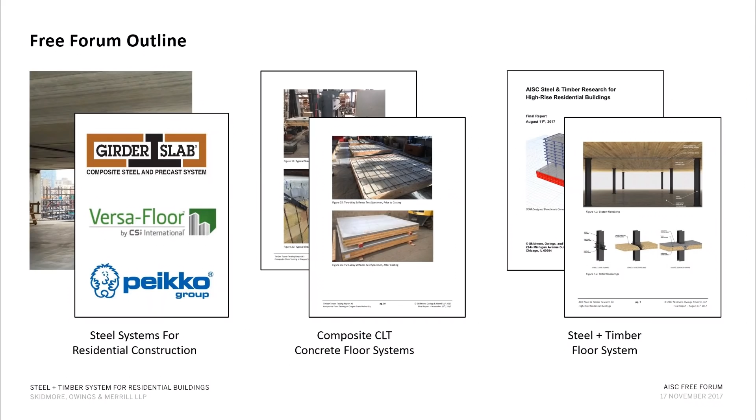The outline of today's talk is going to cover three main sections. The first one will look at steel systems that have been developed to date for residential construction. We'll then discuss composite cross-laminated timber floor systems that use reinforced concrete topping slabs as the basis for the research project going forward. And then lastly, we'll talk specifically about the structural steel frame and timber decking system that we've developed for mid and high-rise buildings.

To start, we want to put things into context and why it's important to develop sustainable systems for mid and high-rise buildings. When you look at apartments and condominiums, hotels, student housing, and senior housing, they account for 27% of the total construction volume based on AISC's national market analysis. This is a very large percentage of construction. So what we want to be able to do is develop appropriate structural systems for these buildings to give more differentiation in the marketplace and more options for our clients.

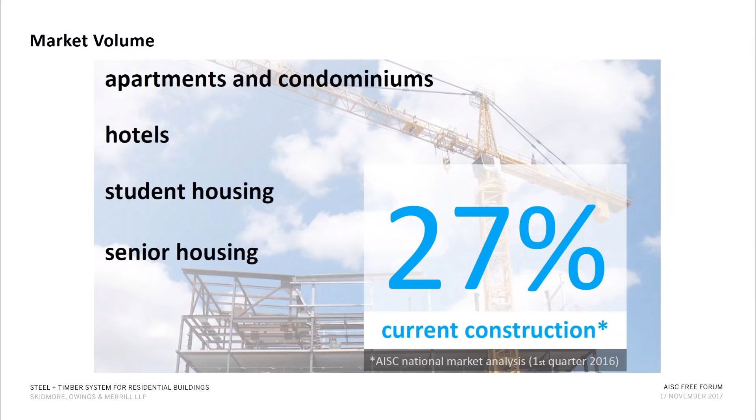Residential buildings have a unique set of criteria that need to be considered. For starters, there's a unique layout of rooms and services that change depending on the unit types and positions, and these can be relatively different from level to level, whether it's a studio, 1, 2, or 3 bedroom unit, and they can change from story to story. Compared to an office building, accommodating these sometimes random-seeming room layouts is a major criterion. One of the ways this is achieved is with a flat soffit condition - meaning a flat bottom of structure with no projecting beams. This allows you to plan out units of any size and configuration without regard to the structural system. The only thing you have to contend with are the columns in the space.

Residential buildings also need to consider the high acoustic requirements associated with this construction type. The building codes demand a certain sound transmission class, or STC, that grades the amount of acoustic resistance between units. It's obviously very important for a residential building, because when you're trying to get some sleep while there's a large house party happening above you, you don't want that noise coming down into your space.

And then lastly, the floor heights and costs. One of the things that drives the cost on these buildings are the floor-to-floor heights. So if we can minimize the structural depth associated with the system, we can reduce floor-to-floor heights and the associated cost. All of the research we're going to show you today is predicated around an SOM design benchmark shown on the right-hand side. This uses a conventional cast-in-place concrete frame with 8-inch thick post-tension slabs. We would consider this to be the standard of what you would see in residential construction typically today. It's a very, very economical system and allows for all the things just discussed.

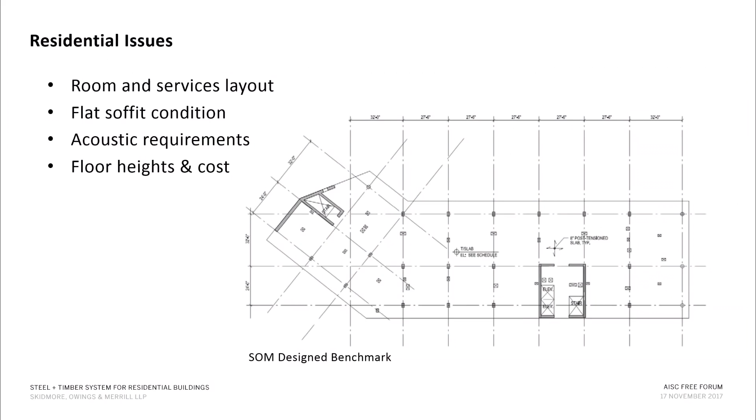So when we go and talk about our proposed system today, it's going to be through the lens of this benchmark concrete building. So let's talk about some of the steel systems that have been designed for residential buildings today.

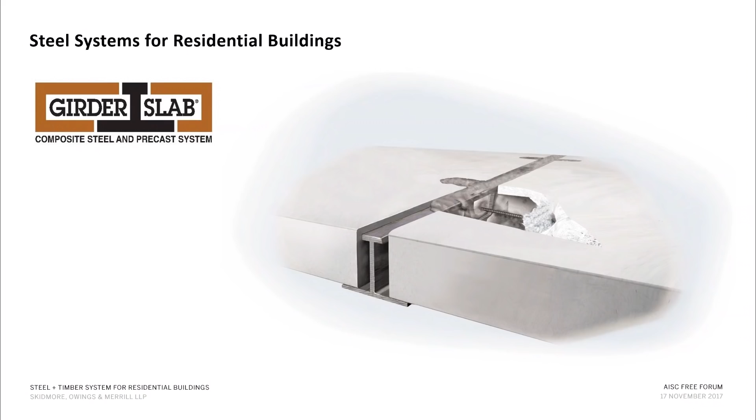One of the good systems out there that we've seen is the girder slab system. It's a composite structural steel beam that's asymmetrical and precast concrete floor system, typically hollow core plank. This system uses a structural steel frame where the asymmetrical beam has a larger bottom flange that allows the hollow core plank to be set on the bottom flange and then grouted in for its final condition.

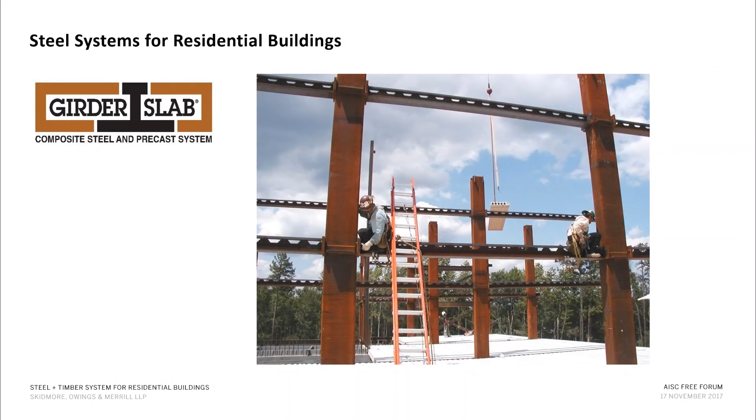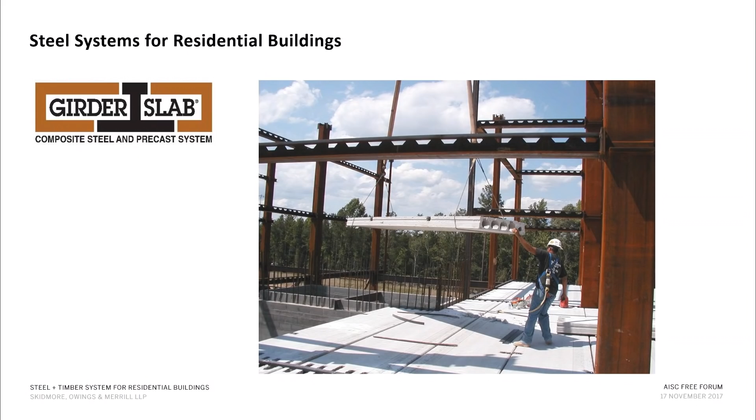It uses a castellated beam style structural frame that allows the concrete to flow through and join them together. Here you can see some of the erection of a frame using this system. The structural steel goes in, and then the hollow core planks just sit on the bottom flanges, creating an almost near flat soffit condition. So again, you only have to contend with the position of the columns related to the unit layouts in the building. And this is the final product.

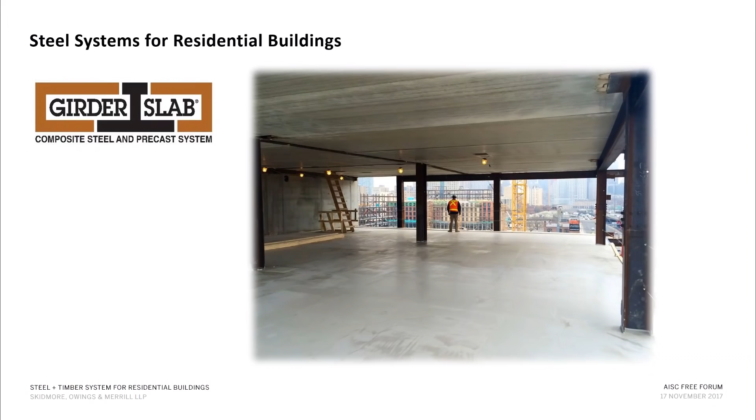As you can see, it has a lot of the same benefits that you would see with other technologies in terms of unit layout and space planning. You can get large bays with minimal obstruction, so a very good system.

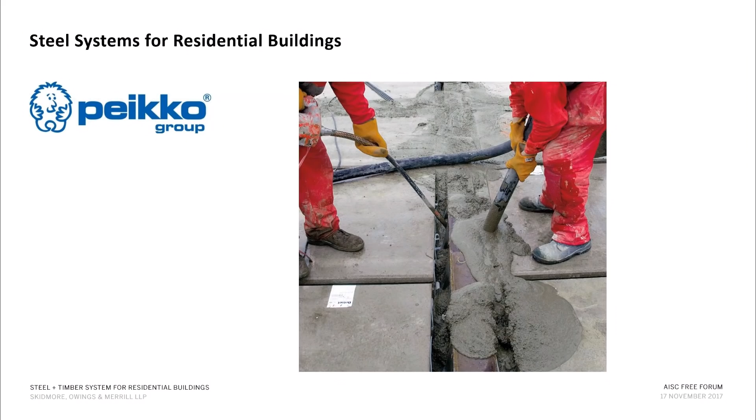There's other approaches as well, like the Peikko group shown here. It's a similar concept where you're using a special structural steel beam with some hollow core planks resting on it. This beam uses a trapezoidal shape where the bottom flange again is extended to accept the precast, but now when the concrete is poured and grouted in, it makes a continuous beam. Here you can see that operation right now where the concrete is getting poured for the final condition.

And this is a built example here. Again, a similar approach where you have a flat soffit condition using the post-tensioned or pre-tensioned hollow core planks. And lastly, we wanted to show a different approach.

The first two were showing the hollow core planks. This one uses actually a deeper deck system. This is the VersaFloor system using a deep deck profile, which can give you, I believe, 7-inch deep metal decks. There's a couple different ways that they can use these. You can do it with conventional structural steel beams or drop down. And they've also developed a system called the Diversakore, which uses a bent steel plate as the final beam.

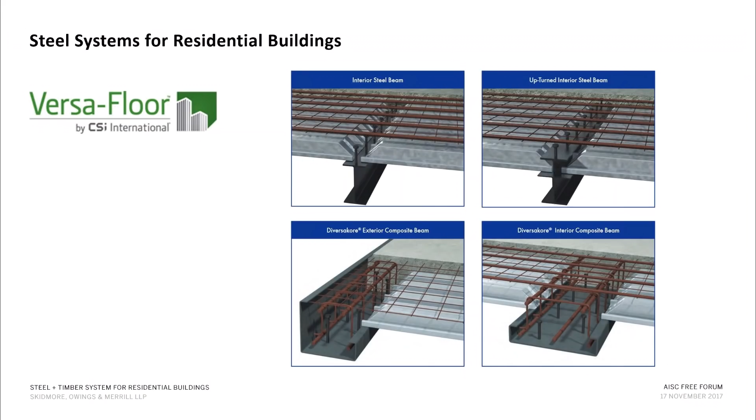In this way, basically, all of the steel is acting like leave-in-place formwork. So again, another operation with some similarities here, but again, a near flat soffit condition for each of these types for the discussions mentioned earlier. And here you can see them pouring the floor. So again, the end product for each of these is essentially the same. You have a concrete slab as your substrate for finishes and for everything else in your building, a structural steel frame, but very few beam conditions to deal with.

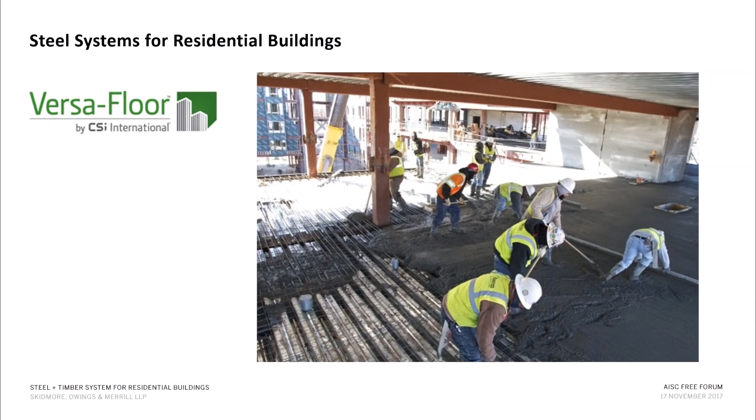So moving on and looking at new opportunities, let's talk about composite cross-laminated timber and concrete floor systems.

SOM has been researching timber construction for over 5 years now, looking at mid and high-rise buildings. We've shown 2 reports that are available on the left-hand side, with 2 more that are going to be published in the coming days, that being the AISC report we're discussing today, but then the Oregon State report shown with some of the testing images on the right-hand side.

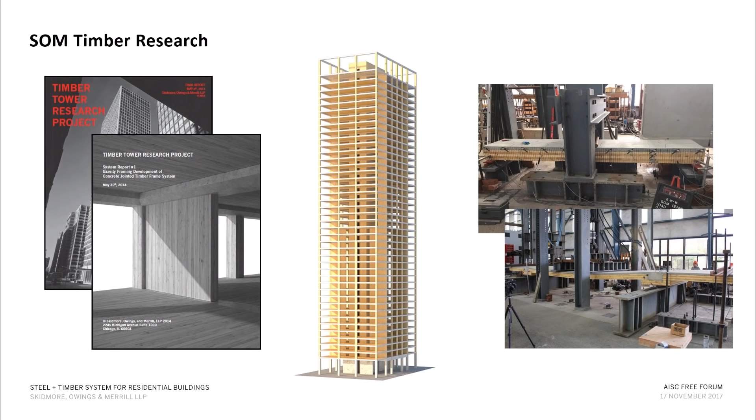The research we did looking into the high-rise building started with a survey of all the available timber technologies we had available to us. This ranges from the timber elements themselves, shown on the left-hand side, to the connector types, shown in the middle, with some of these fancy screws and glued-in plates. And then lastly, looking at timber concrete composites, an idea of combining the 2 materials as shown on the right-hand side.

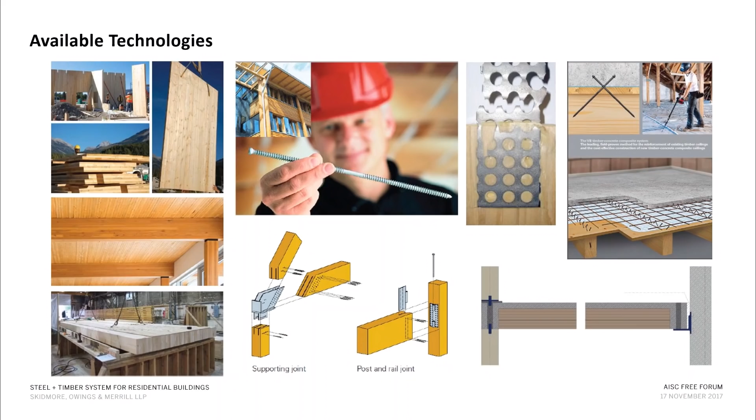If we look at the timber elements themselves, there's a lot of different available technologies out there, and we put them all into a category of mass timber. What we mean by that is things that have similar properties to a natural heavy timber element, but that are built up from individual pieces of wood. So in that family would involve things like glue laminated timber columns and beams, like shown in the upper left-hand photo, nail laminated timber decks, shown in the lower left-hand corner, and then also the finished product on the upper left.

The nail laminated timber decks are essentially 2x6s or 2x8s that are nailed to each other on the side face along the entire way to build up a solid timber deck. And then lastly, there's cross-laminated timber on the right-hand side, which is essentially like mega plywood, where you have boards that are glued on their face and then alternate in directions each 90 degrees.

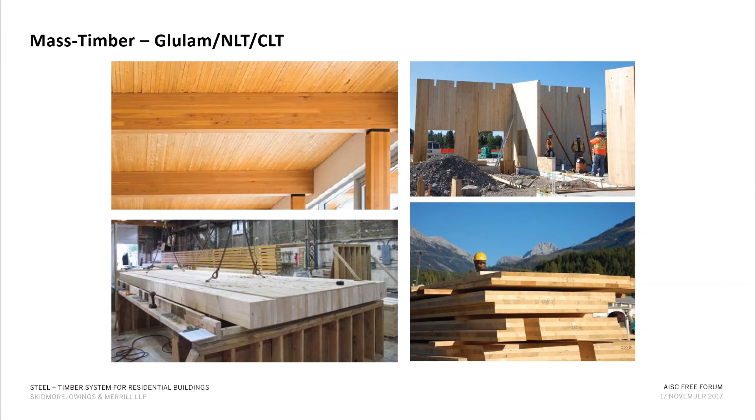We'll focus primarily on cross-laminated timber because we see that as the way of the future over some of these other technologies. CLT itself has a lot of advantages. It's prefabricated, lightweight, a thermal insulator, and it has certain marketing advantages. But there's other issues too that make it attractive for residential construction, including its two-way spanning capabilities.

Because of the cross-lamination and orientations changing every layer, it allows the material to span in two directions. That's really important when you start to look at floor penetrations that don't necessarily align with your structural module. It's nice to have that aspect because it allows you to get loads around the areas.

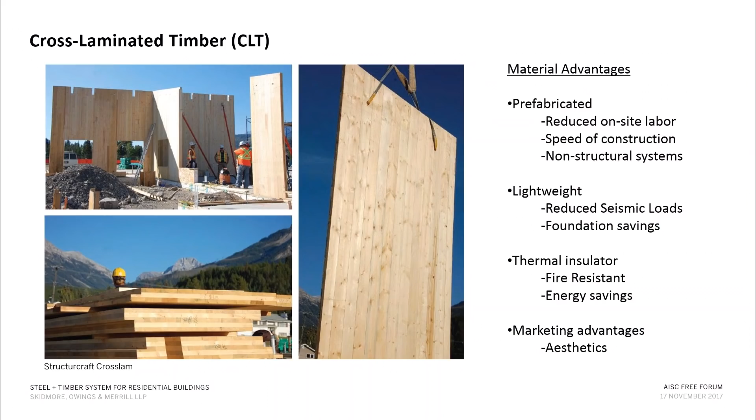One of the challenges with cross-laminated timber is the acoustics associated with it. Wood is about 1/5 the density of concrete, so it becomes very lightweight even when it's a solid timber floor system. So to solve the acoustics, there's a couple of ways to do it.

One is to have a drop ceiling as shown on the left-hand side. That's got a lot of challenges associated with cost, and it also increases the ceiling section. On the right-hand side is a more common approach, and that uses a concrete topping slab, be it non-structural or structural, to add a little bit of mass into the system and to isolate the layers from each other.

And in doing so, you can get an STC that's code acceptable and still expose the bottom side of the CLT, which we see as a good approach.

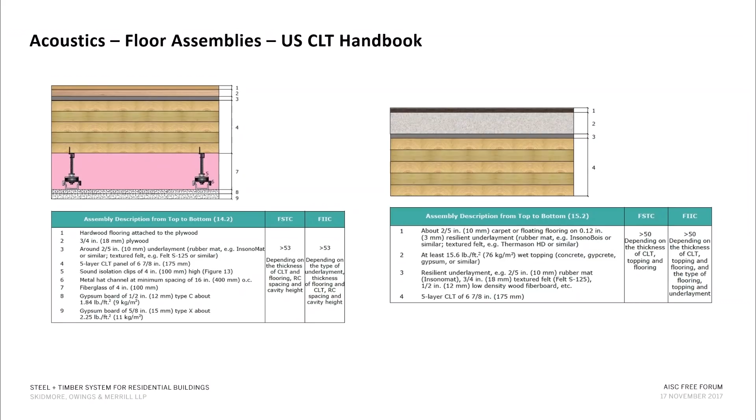The other thing you need to be aware of when talking about cross-laminated timber is the fire resistance. Again, we use the term mass timber because it has a lot of similarities with heavy timber, including the charring response to fire. So when we look at the fire design of CLT, we have to consider three things: the structural resistance, its ability to carry load long-term after it's lost section due to charring; an integrity failure, which prevents the movement of heat and flame through to another side; and then lastly, the insulation failure.

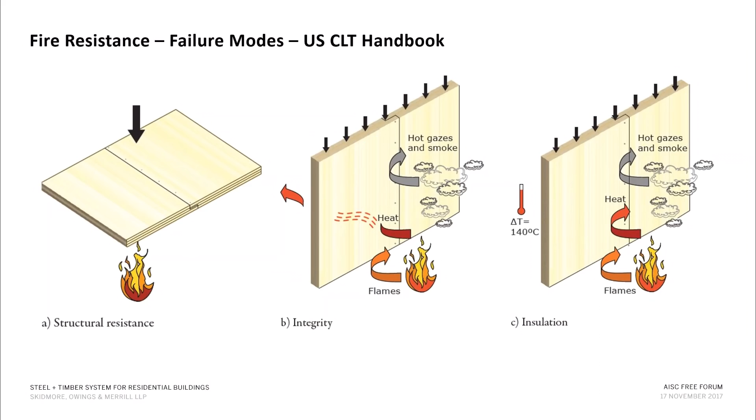We mentioned that CLT is a natural insulator, so there's very little issue with the temperature increase on the other side. It's really the structural resistance and integrity that we need to consider.

Considering those two failure modes, there's two different ways to look at it. The first is the charring behavior shown on the left. Charring is a natural phenomenon that insulates the structural core of the timber element, keeping it cool and structurally sound, meaning it can carry load.

There's a lot of methods out there substantiated by testing results that allow you to calculate a reduced strength due to charring in a fire condition to verify structural integrity. That's how you solve the first one.

The second one is with testing, where we're trying to look at the actual integrity failure and not allowing flame to pass to the next level. This is actually the more concerning thing when it comes to timber. There's a lot of reserve capacity, but letting the flames pass through is actually a bigger issue. So when these tests are done, you can see on the right-hand side, they're typically showing failures in integrity.

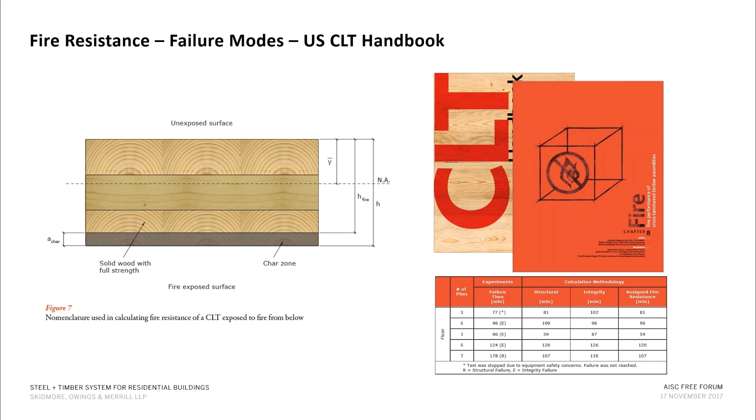We can solve that, again, with a concrete topping slab that you might need for acoustics. This is where it leads us to in terms of composite concrete topping slabs and what we want to achieve. We know that we want the concrete topping slab to solve our acoustic issues so that we can expose the underside of the timber.

The concrete topping slab also increases the fire resistance by creating a non-combustible barrier in between levels that cuts off the chance of an integrity failure.

By making them structural concrete topping slabs and composite, we can actually increase the span length. That means fewer columns on the inside and easier to plan out room layouts. When made structural, the seismic diaphragm can also be handled just in the reinforced concrete portion itself, so it simplifies the design. And lastly, it gives it a measure of durability by protecting the top surface of the CLT.

So when you look at a typical build-up, what you often see is the 5-ply cross-laminated timber, which is approximately 6 3/4 inches thick, plus a concrete topping slab. Our testing at Oregon State University is using a 2 1/4 inch concrete topping slab for a total thickness of 9 inches.

And that's pretty compatible with what you would see in concrete construction for a residential building. Usually it's about an 8-inch concrete slab, maybe a little bit thicker, it can need longer spans. So it's compatible in terms of floor-to-floor heights and ceiling sandwiches.

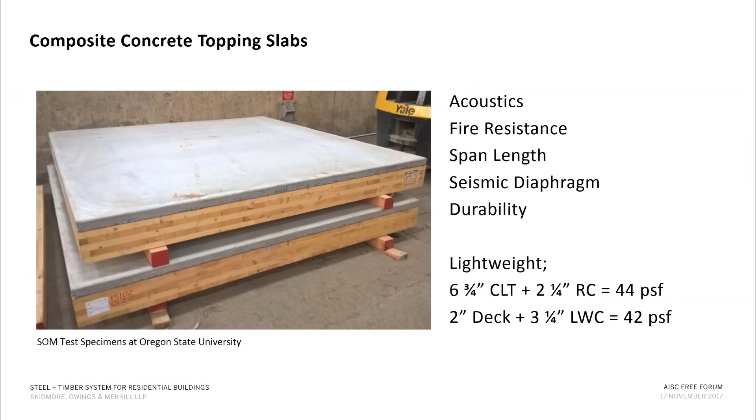The topping slabs we use are typically normal weight concrete, which really comes down to availability. Lightweight concrete isn't available everywhere, so we try to use normal weight concrete where possible. It has a couple other benefits: normal weight concrete has increased tensile capacity compared to lightweight concrete, so you'd typically expect less cracking in your slabs long term, and the additional mass gives you better acoustic performance.

That's important for the CLT. Now, lastly, it comes at a cost of increased mass from a structural perspective, whether it be foundation design, seismic design, or column design. It adds up. So if you compare the same design using lightweight concrete versus normal weight concrete, there's not really much of a difference—it's 38 PSF versus 44 PSF. So when you compare the two materials, it really just comes down to availability. All those other things are basically details. It changes the mass a little, changes the performance a little, but normal weight concrete's available everywhere, so that's what we like to proceed with, and that's what we tested at Oregon State.

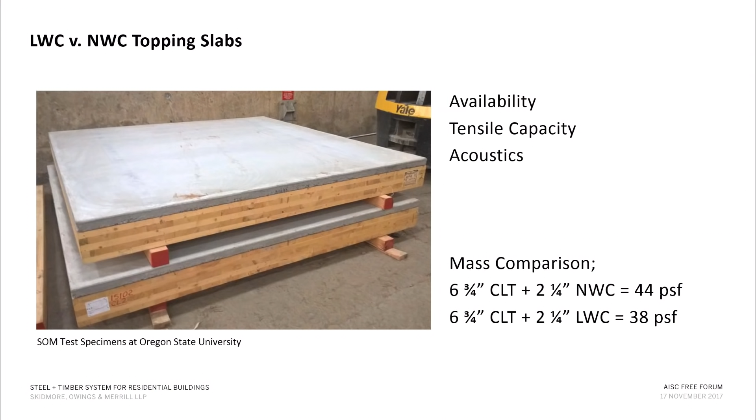Here's the Oregon State testing program. You can see their laboratory here with 3 test specimens down low. We studied over 20 different tests and 14 different specimens, all full scale, looking at different ways to connect and make composite action. One of the connectors we use most frequently is inclined screws, and you'll see those in the reports that will be published soon, showing how we connect them.

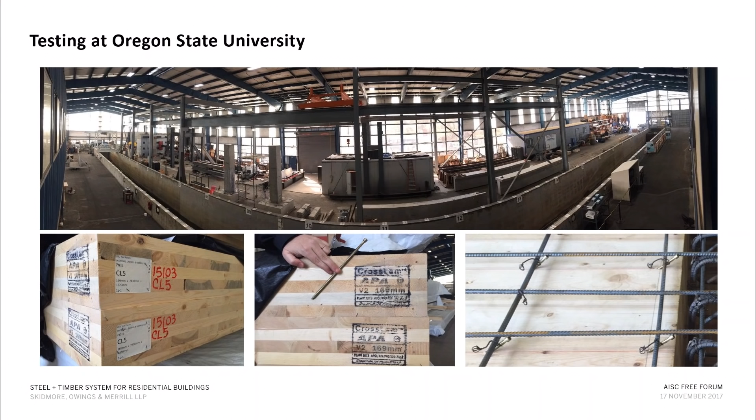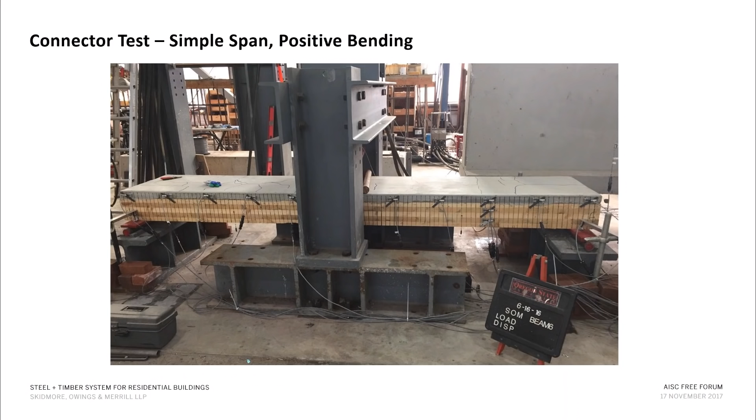One of the types of tests we did was a simple span, positive bending test, looking at the effect of different connector types. We looked at glued-in connectors, mechanical connectors, and some standard shear stud connectors with screws. This also let us understand the different performance and available strength and stiffness from them.

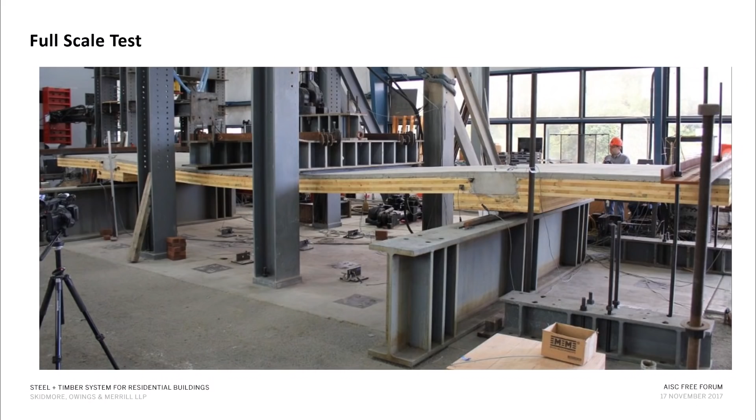Looking at these composites, by making them continuous we can get longer spans, which are better for residential layouts, all while not adding additional materials. We're just taking the materials we already need—CLT and concrete for acoustics—and making them composite.

So moving on now to the main portion of the webinar here, which is the structural steel and timber system that we've developed with the AISC.

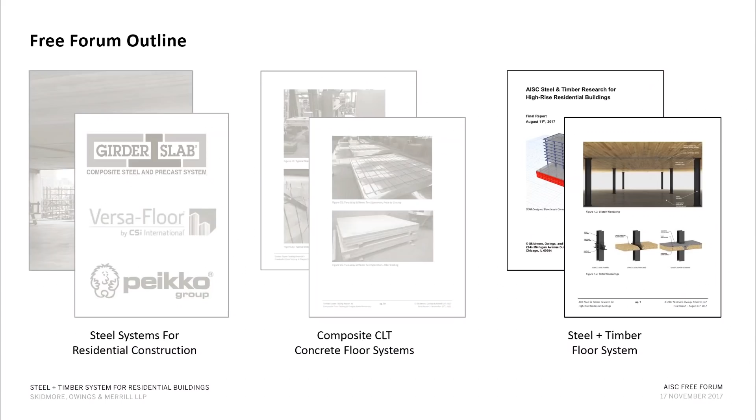Looking at cross-laminated timber and composites, it really is a new technology, and that creates a new opportunity for the structural steel industry.

If you look at the different types of floor systems that have been available, we started with things like clay tile arches and other floor systems, which have now been defunct and replaced by metal deck slabs, precast concrete slabs, and everything else. The idea of a structural steel frame has been a consistent theme in the construction industry for over 100 years, but the actual floor systems we plug into them have changed and will continue to change over time. So now that we see this new decking type system of composite cross-laminated timber floors, it really is a new opportunity for structural steel frames to take a look at and see what kind of benefits can be had by combining the two.

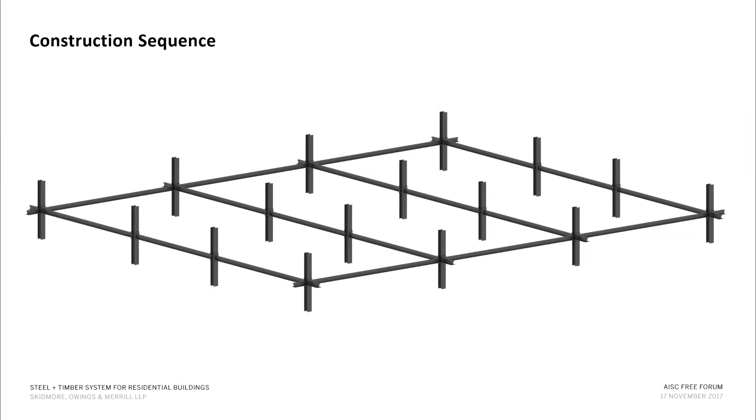So let me show you a little of the construction sequence and how we think a system of this nature would work. You would start again with a structural steel frame of beams and columns, erected for 1, 2, or 3 stories ahead of the rest of the operations on site. After the steel frame is erected, you would then drop in your mass timber decks. In this example, we're talking about cross-laminated timber decks, but you could also do nail-laminated timber if it suited your project.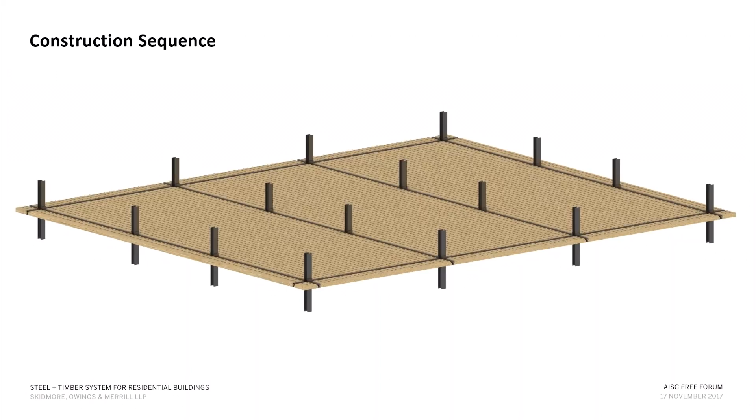After the mass timber decks are dropped in and installed, sitting on the bottom flange of the steel beam, we place reinforcing in the top slab. This would be welded wire fabric typically, and then if you need additional capacity over the beams where you have negative bending or diaphragm loads near a core, you could add additional rebar.

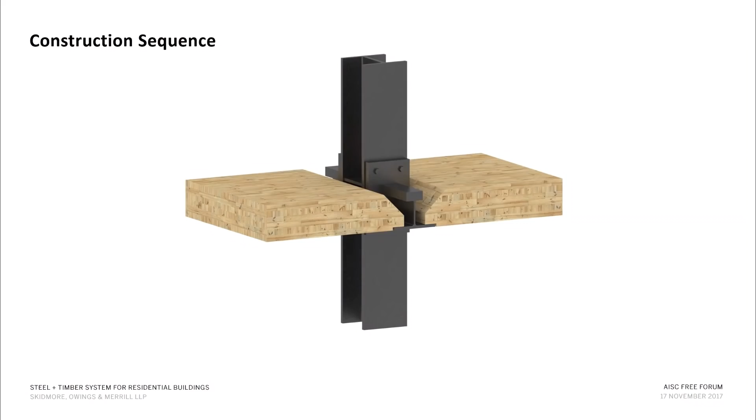And then the topping slab is poured. Taking a closer look, we start with a structural steel beam. Again, we're suggesting an asymmetric steel beam to facilitate the placement of the timber decks. You drop in the timber decks to have a flat soffit condition. Install your rebar and composite connectors, and then pour your concrete to make the entire system work. And that's your final product right here.

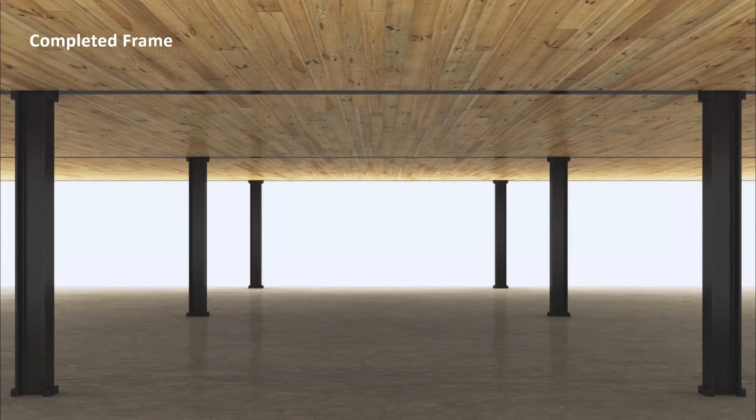What's interesting about this one is that because it's an easy product to CNC, the cross-laminated timber, it's easy to CNC the end connections so that we can actually get a truly flat soffit condition by routering out the thickness of the flanges of the steel beams that it supports.

Looking at the details of the research project, which is going to be published on SOM.com in the coming days, it really breaks down into a few different sections. The goal is to show how the system would be applied to the SOM design benchmark building, but more importantly, show the details and concepts that would be used, which could be applied to framing bay sizes of any size for a real project.

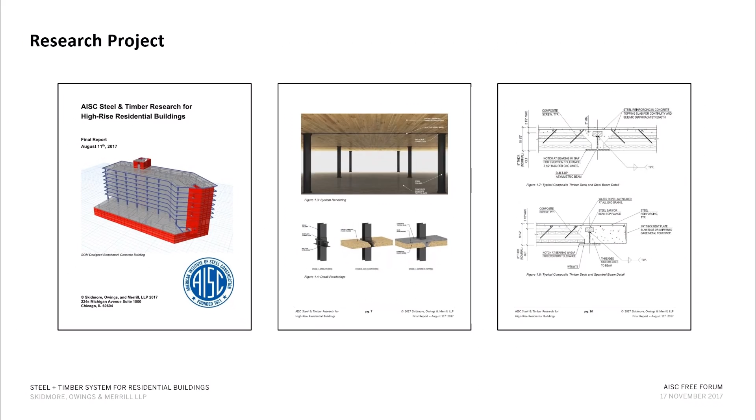It goes through a few different zones, a few different sections, and tries to explain why we're trying to do these things - what are the critical issues in the design process that led us to these decisions. And then we show the approach, and then we finish off with non-structural considerations, and then a comparison to the benchmark.

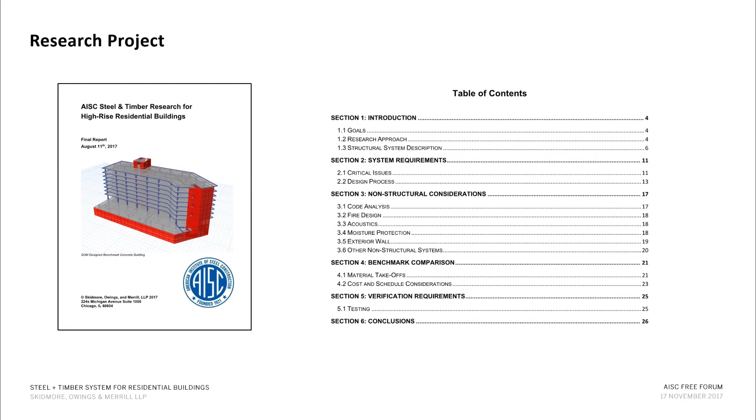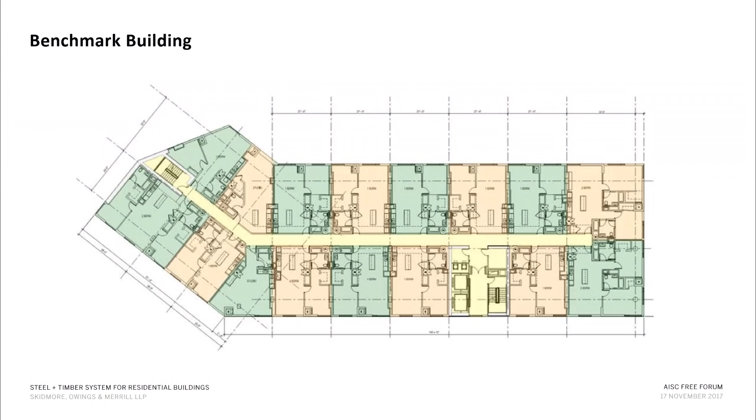Talking about the benchmark, this shows you the architectural floor plans on a typical floor. The yellow sections are common corridor areas and core areas for the elevator core on the right and the remote stair on the left. The green and orange just show differentiations between units and their demising locations. As you can see, this floor plate accommodates a wide range of unit sizes and shapes, and is pretty consistent with what you see in a lot of buildings in this height range, sort of 10 to 12 stories.

This is the structural layout for that same building. You can see there's a reinforced concrete core around the elevators and stairs to the right, and then a reinforced concrete core around the stair to the left, with some additional isolated concrete walls connected into that stair core to give it a balanced stiffness with the core to the right.

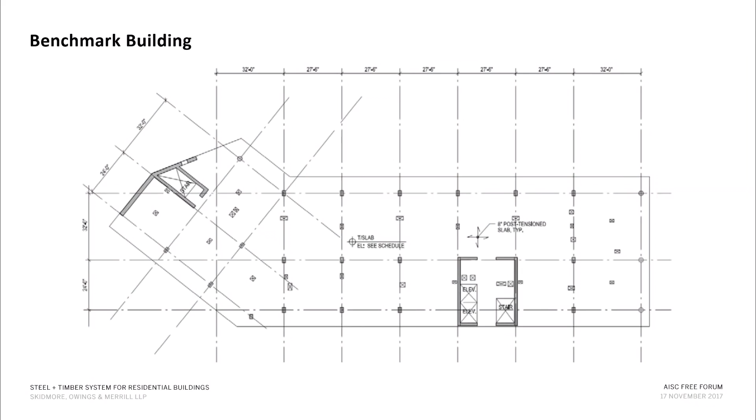There are only 3 concrete columns between the cross section of the floor plate, and we do that to reduce the number, also with a moderate slab cantilever on the 2 sides. It's an 8-inch thick post-tension slab, which is able to achieve these spans and also solves the acoustic issues as well.

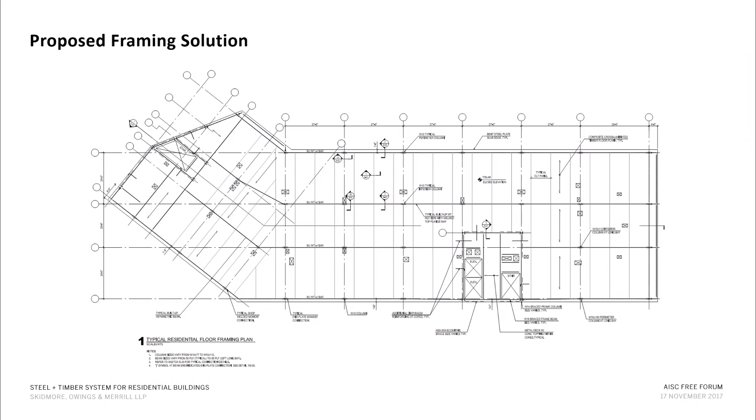The elements highlighted in red are structural steel. Everything else would be composite cross-laminated timber floors. We provided 4 asymmetric steel beams running along the axis of the floor plate, with the timber decks spanning in between them. We located those framing lines so that they would not hit any of the potential floor openings in the system. And then you can see all of the floor openings that go directly through the composite cross-laminated timber deck.

The 2 core areas highlighted in red are structural steel framed cores with composite metal deck slabs. We didn't want to provide any combustible construction within the core area because, again, this is intended for mid and high-rise buildings where performance fire design may be required. So keeping the egress areas non-combustible feels like a reasonable thing to do to enhance the fire performance.

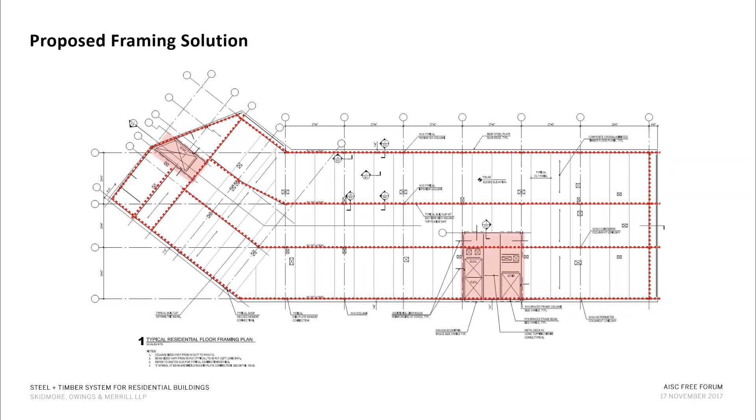This is the typical detail looking at an interior beam. So what you have is the asymmetric beam, steel beam, that's formed with a WT section and a thickened bar welded to the top. That asymmetric beam section allows the cross-laminated timber floor planks to be dropped straight down and supported on the bottom flange. The cross-laminated timber decks are notched as shown to create a completely flat soffit condition.

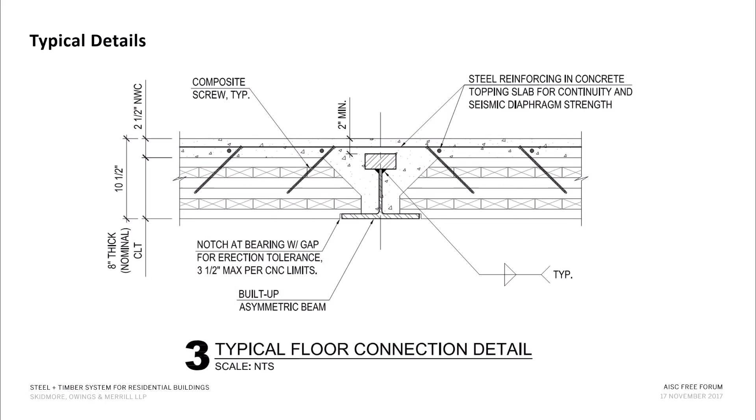And they're also notched to facilitate the concrete placement of the topping slab. This detail also shows the composite connectors to the topping slab and reinforcing over the supports. That reinforcing is continuous and allows the cross-laminated timber floor planks to span as far as we indicate on the framing plan.

This is a typical detail at the exterior condition. At the exterior, we stop the steel beam about 1.5 feet away from the edge of slab, done for the particular constraints of the benchmark building. It's not necessarily a requirement for the system, but we showed it anyways to see how you could achieve a longer slab cantilever with a bent plate bolted to the bottom flange of the WT shape. This has benefits later when discussing the exterior wall connection, but again, a similar detail that allows for a nearly flat soffit condition.

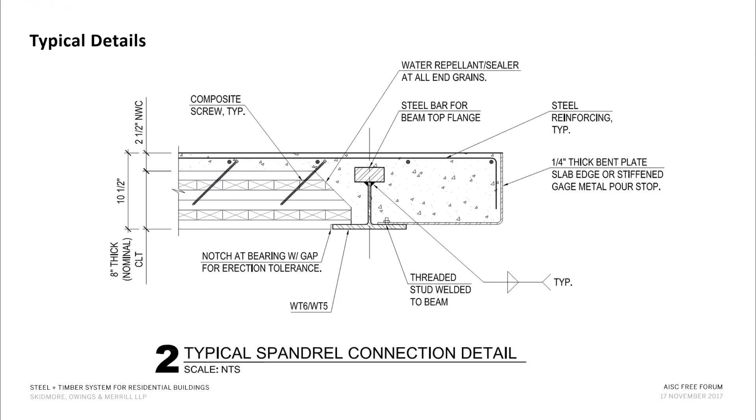If we zoom in and take a closer look at the framing bay, you can see the typical approach: 2 columns spaced at some reasonable module, anywhere in the range of 20 to 28 feet. We're showing 27.6 at this location. Now the challenge with going 27.6 is that the steel beam tends to deflect a lot.

So we want to reduce that deflection so we don't need secondary floor leveling mechanisms. We're kind of stuck because we need to fit the steel beam within the thickness of the floor sandwich, and also need to make that span. So to do this, we provided moment connections at the ends of the steel beams, using end plate moment connections, which are a very economical way to do it if you're just trying to get deflection reduction.

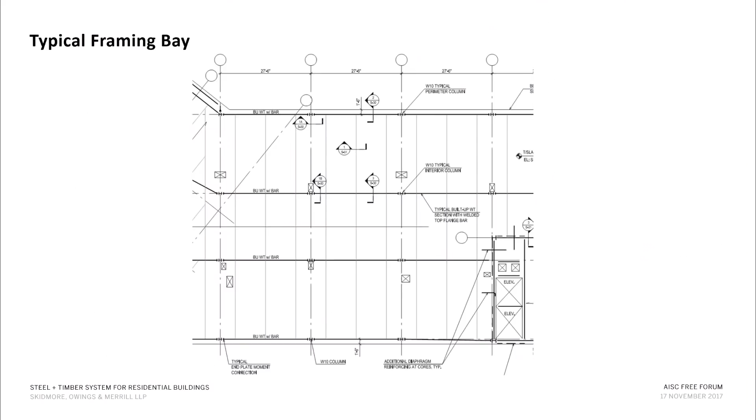These are the typical steel details we proposed at the ends. At the ends of the WT sections, you would have a thickened end plate. This is a conventional connection type shown in other design guides from the AISC. That end plate would be bolted to the face of the column with 4 high-strength steel bolts. The actual design of the connection would be governed by strength, while the beam itself would typically be governed by deflections.

One thing we need to consider with these end plate connections is fit up and tolerance in the field. We've indicated end plate shims between the column and the end connection in this configuration to take up that field adjustability. Other ways can also be done, including prefabricated column trees with drop-in sections. There are a lot of different ways to approach this. This is just one, but at the end of the day, we think rigid end connections for continuous beam bending will be necessary to control deflections.

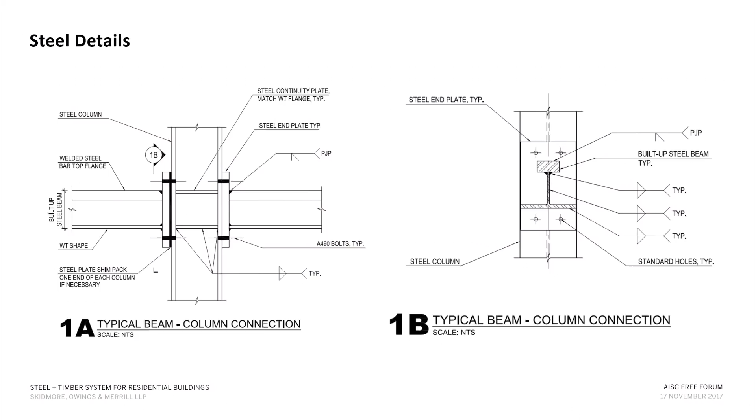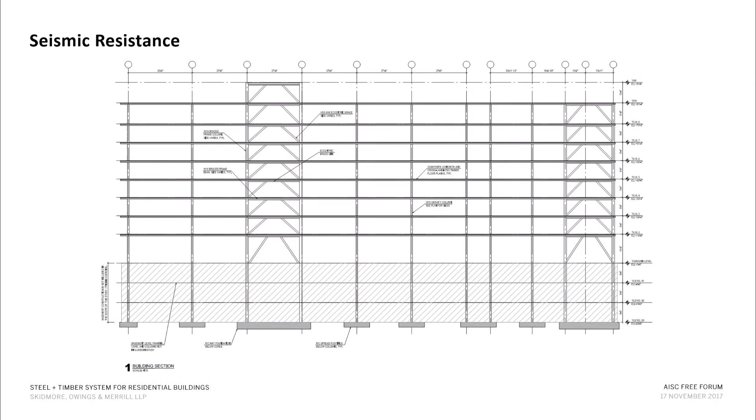Taking a look at the seismic resistance of the building, we've indicated eccentric brace frames. What's important is that we need to consider the seismic resistance associated with the system for an overall comparison to the benchmark building, which is located in California, a high seismic region. The seismic resistance of the building is not outside the scope of the study, but we didn't want to focus too much on the exact seismic resisting system. We've shown EBFs, but these could easily be buckling restrained braces, or moment frames around the perimeter, or a reinforced concrete core if you like. There's really no effect on our proposal because our system is geared towards the gravity framing areas, and you can plug and play whatever seismic resisting system you need.

Where seismic resistance comes into play a bit more is actually in the diaphragm design. The diaphragm design in this approach relied only on the reinforced concrete topping slab to deliver seismic loads to the core. We think that's reasonable to do, with additional reinforcing placed where necessary for collector elements and for transfer into the lateral load resisting system.

One of the benefits of the composite timber frame compared to a reinforced concrete building is that seismic loads are about 30 to 40% less. So when we're looking at the diaphragm loads themselves, particularly when using a highly ductile system like buckling restrained braces, the loads are actually quite low. When you combine a ductile seismic resisting system with a low seismic mass gravity framing system, as we're proposing, we're able to achieve the diaphragm resistance as shown. If you have a heavier system or a lower R factor, you might need to rely on structural steel beams as collectors and not just the reinforcing, but that's a project by project decision.

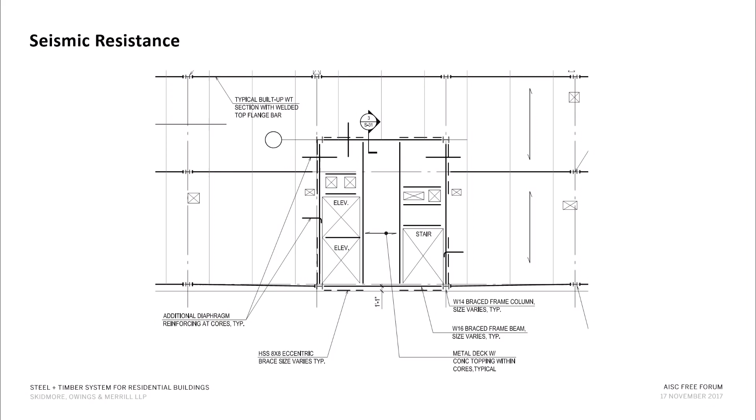This is looking at a couple of different details that we have included in the drawing set that will accompany the report, which will be published online. It shows two different things. On the left-hand side is a typical edge-to-edge connection of a CLT member. We're using inclined screws here just to have vertical compatibility between the two planks. We're not trying to get any seismic load resistance out of them. What we are showing is additional reinforcing where required to carry those seismic loads across that joint.

Similarly, on the right-hand side, you can see this transition between the composite cross-laminated timber system out in the typical floor plate and the metal deck system inside of the cores where we want non-combustible construction. Here we've actually identified additional diaphragm slab reinforcing as required at the core. We think that's appropriate for a building of this size and scale.

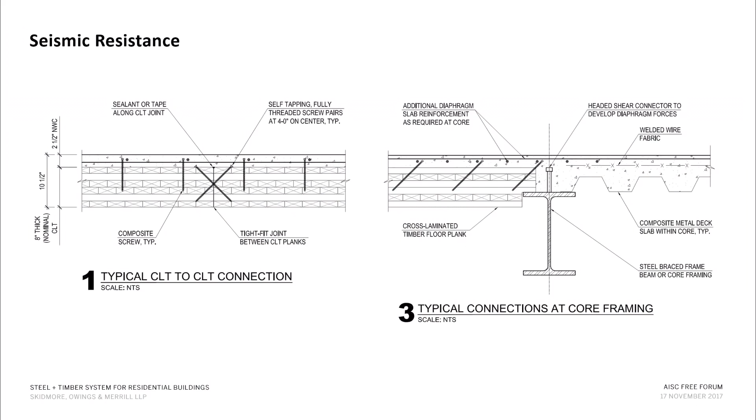Taking a look now at a more detailed discussion of fire resistance. As discussed, there's two things that we need to be mindful of: the structural resistance, the load carrying capacity, and the integrity, the ability to prevent heat and fire and smoke to pass between levels.

We're solving the integrity issues with the cast-in-place concrete topping slab, which is allowed to flow down and encase the entire steel beam. The structural resistance of this system is a different challenge.

It's our expectation that the composite cross-laminated timber floors would satisfy any required fire resistance through the charring behavior. That would allow us to expose the cross-laminated timber soffit, which would reduce costs by letting it be exposed, and then also gives a unique appearance to the space, which is kind of interesting.

The steel beam, the asymmetric steel beam, we would also expect to be unprotected in a fire. And we think that has a possibility because of the unique conditions of the mixed materials. The cross-laminated timber is a good insulator, and it's going to keep the topping slab and the concrete encasement around the steel beam relatively cool in a fire.

And what that does is it actually provides a perfect heat sink for the steel beam to reduce its temperature loads by putting its heat into the topping slab and the encasement. By doing this, it will keep the temperature of the steel beam low enough that it should be able to support loads unprotected.

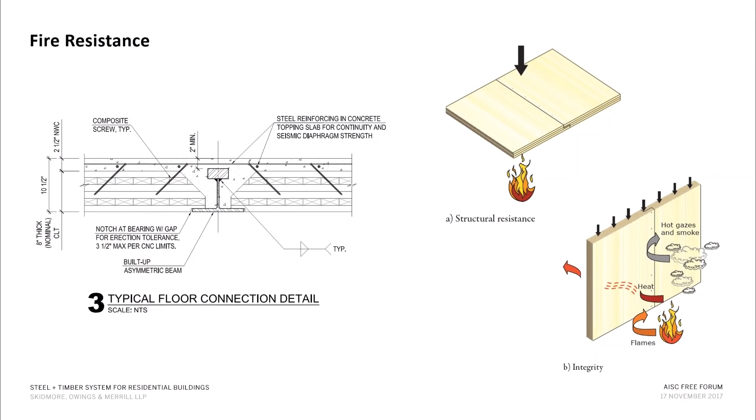Again, the focus of the report was the typical gravity framing systems, but in order to make an appropriate comparison to the benchmark, we have to take a look at the foundation design.

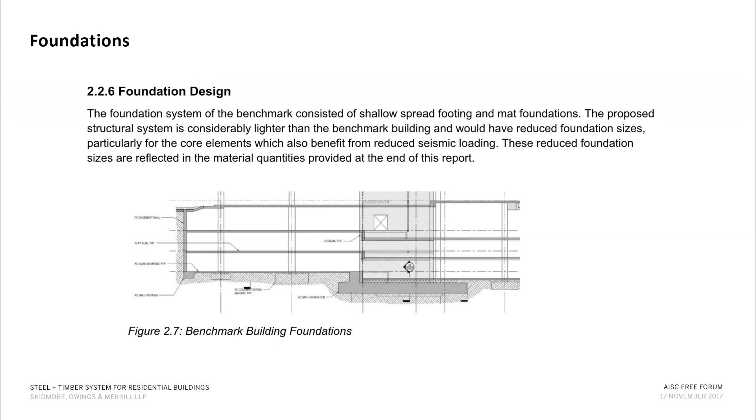The foundation design for the benchmark building used isolated spread footings and then a combined mat foundation under the cores. The total foundation loads, when looking at the gravity and seismic overturning effects, are substantially lower for the proposed steel and composite timber system. As a result, the foundation demands go down substantially, and there's significant savings in the foundation levels.

Taking a look at other non-structural considerations, the first one we want to take a look at is the typical exterior wall detail. This shows a curtain wall system being supported off of the reinforced concrete slab edge discussed earlier.

This is one of the reasons why we like the composite approach: we can extend the reinforced concrete section out to support the exterior wall without having to retool or change the type of connectors. So if you're using a Halfen insert or some other proprietary connector for these things that are designed to go into concrete, we don't need to change any of that for this system. We can go ahead and provide that same approach here with very little concern.

Now, another thing to keep in mind is that we're gearing this system towards mid and high-rise buildings where a higher level of fire performance would be required.

If you look at the performance of the exterior wall system in a fire, we need to concern ourselves with that interface between the edge of slab and exterior wall condition, where we would actually have the smoke and fire stopping systems at the edge. By providing non-combustible construction for that attachment, it increases the reliability of our connection and increases its robustness in a fire condition. So all good things for the system to help it satisfy performance-based requirements.

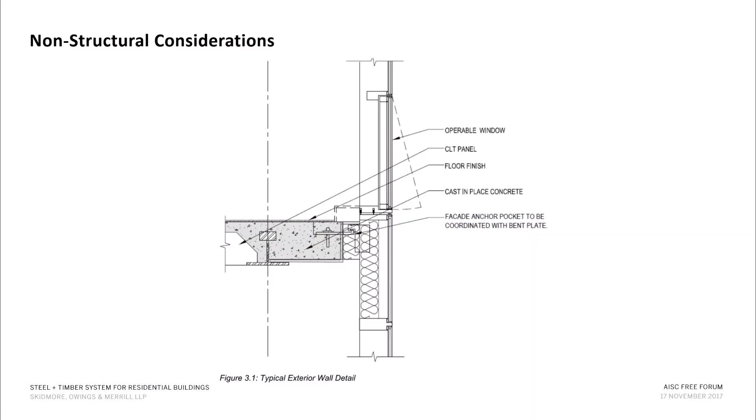Lastly, this shows the system's comparison between the steel and concrete benchmark system. We've provided structural steel quantities, slab reinforcing quantities, concrete quantities, and cross-laminated timber quantities for the system, alongside takeoff material quantities for the benchmark building.

When you compare the two, they use a similar amount of volumetric materials, meaning concrete plus cross-laminated timber. And if you look at the reinforcing in the benchmark system versus the structural steel and reinforcing in the proposed system, they're not all that off, considering that post-tensioning is much more intensive than reinforcing from a cost perspective.

So initial cost analysis of these two systems shows that the proposed system could be competitive depending on the project requirements, but it does take a full building evaluation, considering things like foundation impacts, non-structural implications and attachments to the frame, as well as speed of construction, which is perhaps the most important thing.

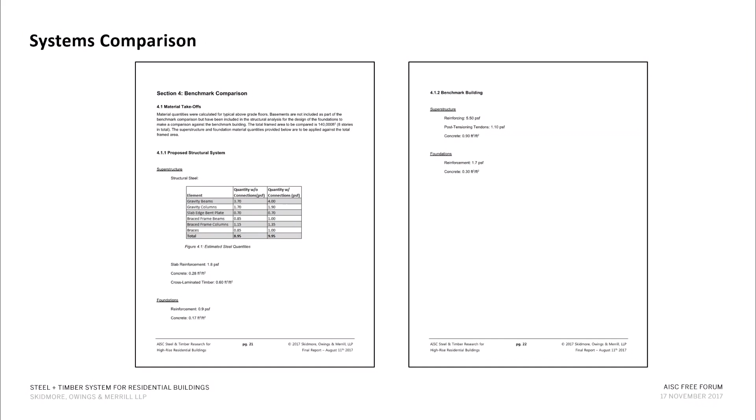These prefabricated systems will be able to be constructed much quicker than cast-in-place concrete, particularly when we're talking about high seismic zones that might have congested rebar within the core walls. So that information is available from the AISC.

Looking back at our proposed systems and now talking about the conclusions from today's webinar. The system was designed really around economy of labor and material.

What we wanted to do was start with a composite cross-laminated timber deck thickness that's suitable for acoustics and fire resistance. 5 or 6 plies with a 2 or so inch concrete topping slab is about the thickest system buildup you want to look at. So if we start from that and say how far can we span with it and set out our framing lines, we end up getting to the system that we showed here today.

But it's also about economy of labor. And that's why we showed the asymmetric steel beam, because you can drop the timber planks so much faster onto the steel frame and build it much faster.

That's really important because the speed of construction and the savings is one of the key benefits of these types of structural steel framing systems for residential buildings. They're prefabricated, they're much faster to build.

We talked a lot about the lightweight savings associated with the system. The structural frame is less than half the weight of a concrete frame. And when you add in the non-structural components, it's usually about 60 to 65% of the weight. You can get a lot of benefits for certain sites with a weight savings like that.

So for example, if you have a site that might be looking at the difference between deep foundations and shallow foundations, that might be a good reason to consider a system like this because of those savings that you could see. And they're specifically important for seismic resistant systems.

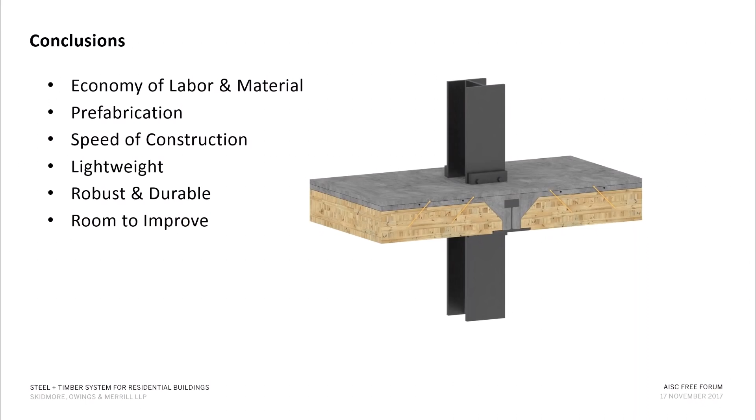New technology, new opportunity. We see a lot of benefit here, and that's why we've engaged with the AISC to deliver this study. Everything that I've shown today is going to be released on som.com under research.

That's going to include the 40-page report that shows the different things, as well as 7 or 8 pages of sketches which identify the actual framing layouts.

That report is also going to be released alongside our testing report at Oregon State University. So for those of you who are not familiar with composite cross-laminated timber floor designs, you'll also have that research report available to you so that you can get a little bit more background information, because we show a lot of the results of that OSU testing and lessons learned in this report for the AISC.